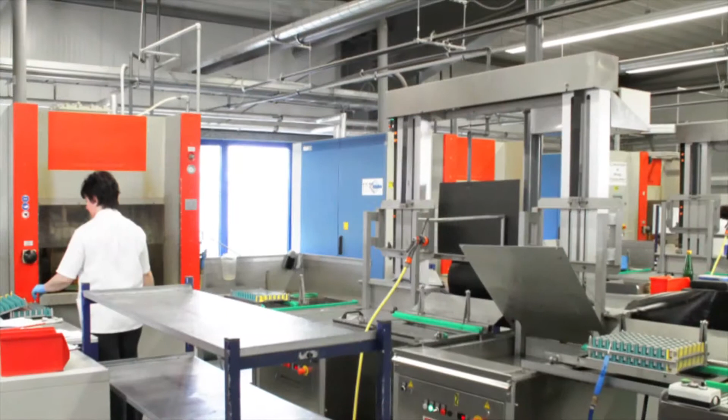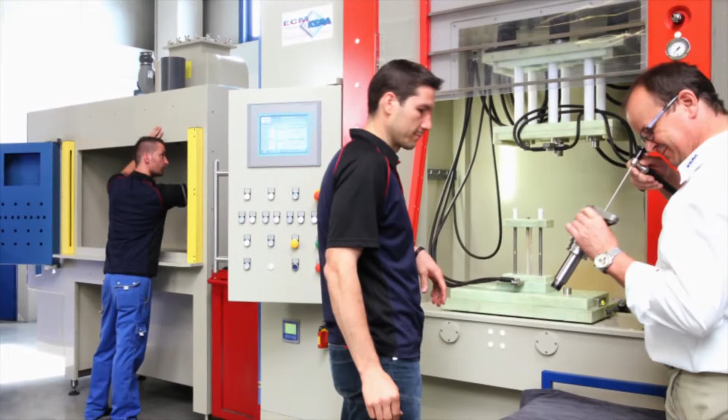KSMA's unchallenged expertise lies primarily in ECM technology, in addition to the related activities of jig building and contract processing. The tremendous potential of this technology was already recognized by the company at an early stage and was further developed and refined in original solutions.

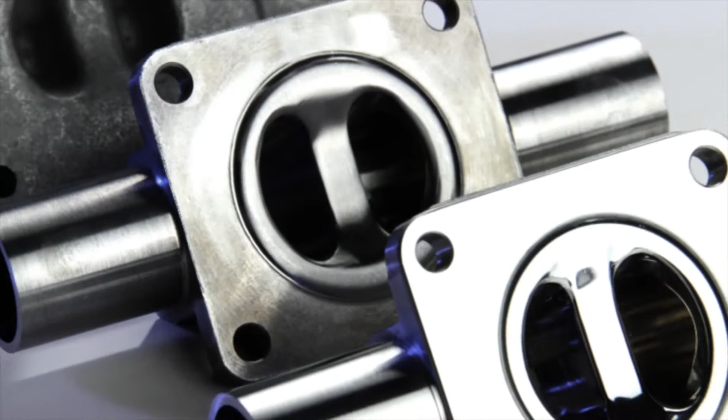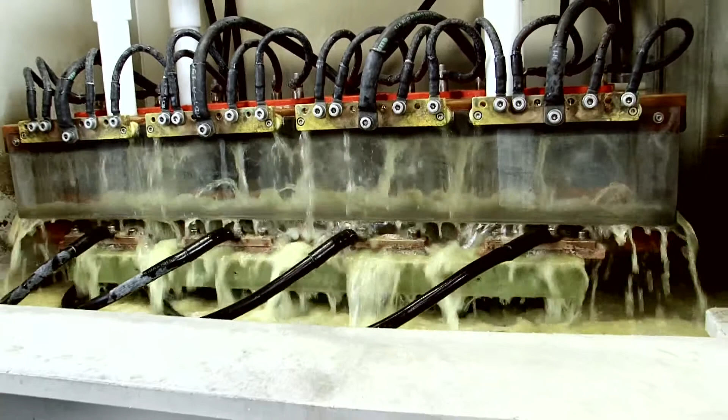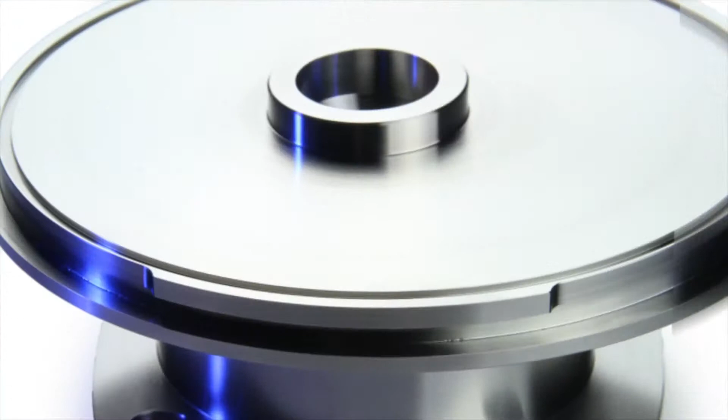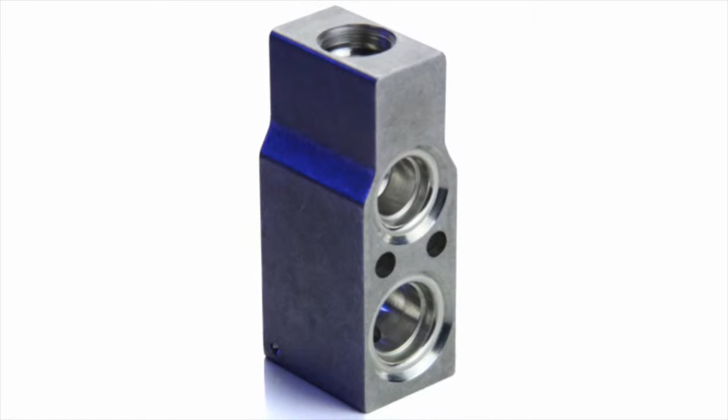During electrochemical machining, particularly very hard materials can be processed with a high level of precision, without any mechanical force transmission, and the accompanying modifications in the material characteristics such as hardness or toughness. This method allows precision deburring, addition of chambers, contours, and drillings in workpieces without modifying the structure of the component, without debris being an issue, or performance of tapping and polishing work on highly sophisticated serial components.

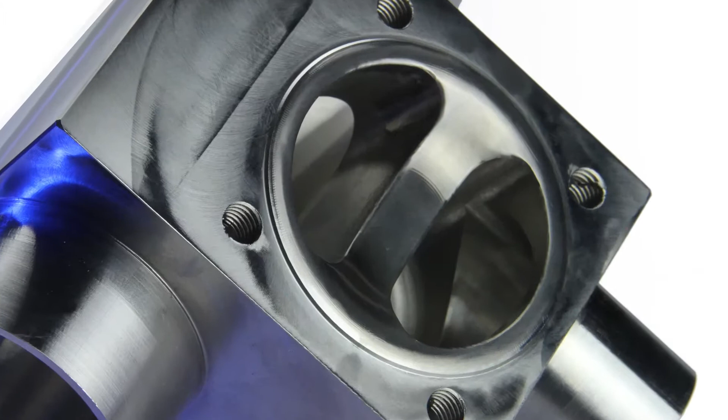Sophisticated solutions for valves and measurement and control technology, the pharmaceutical, biotechnical, and automobile industry.

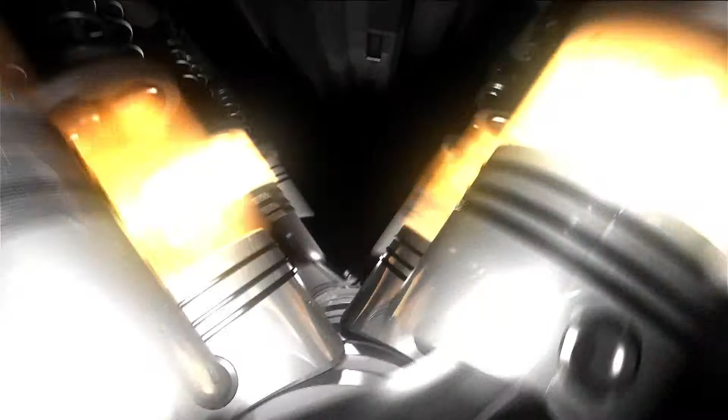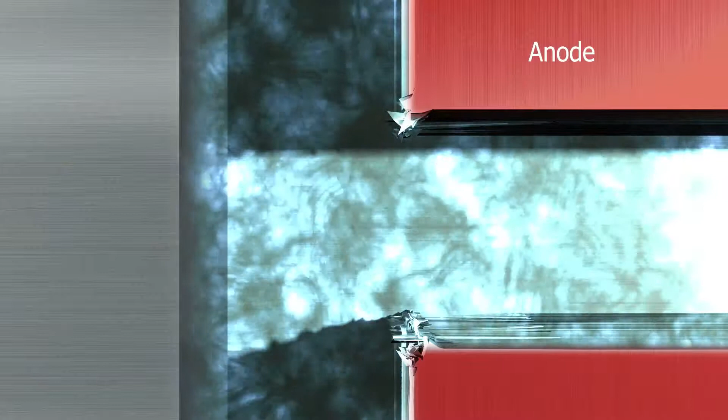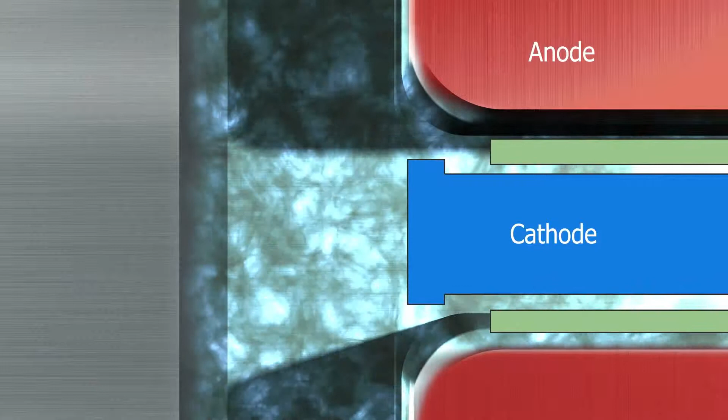In the ECM process, the conductive workpiece forms the anode, and the tool electrode the cathode. Surrounded by an electrolyte solution, the material is specifically electrochemically decomposed by the action of the direct current. Mastery of this process during serial production calls for complex know-how.

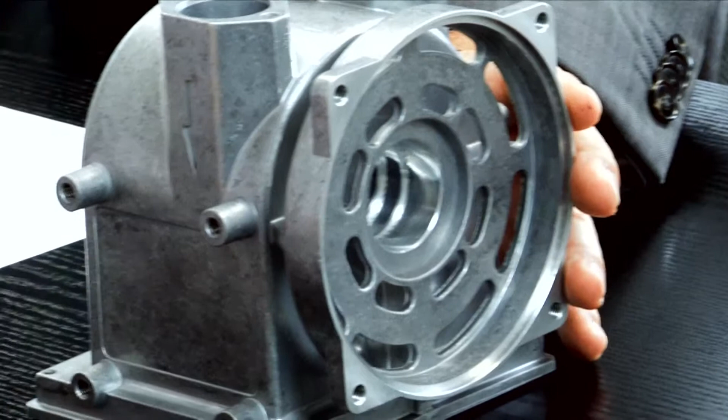KSMA covers the entire spectrum of the workflow chain. That is why it makes sense to contact us already during the development phase. We are familiar with notions such as simultaneous engineering and supply chain management, and develop and produce the appropriate ECM plants and matching jigs.

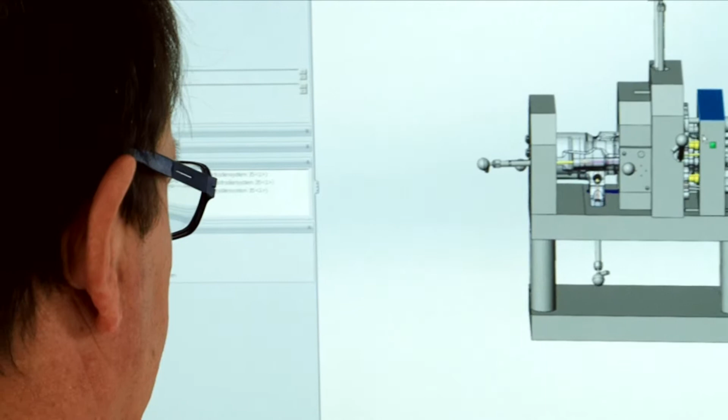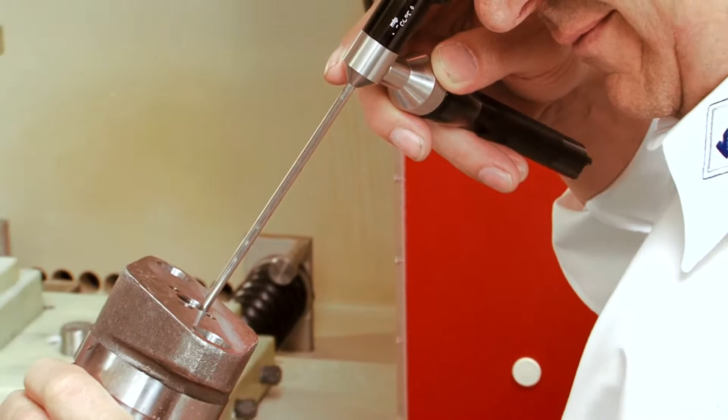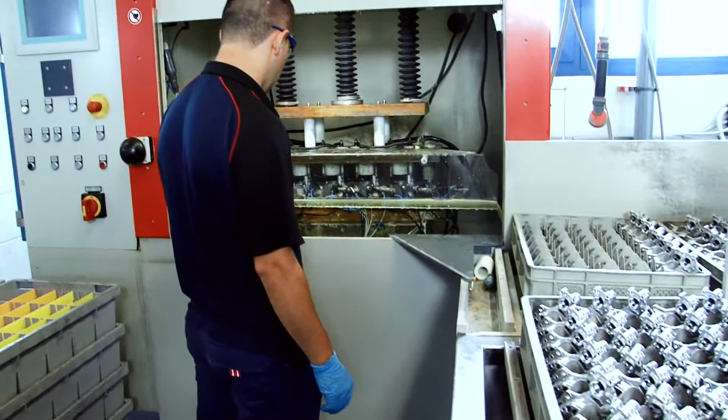As a system provider covering the entire spectrum of ECM technology, we are able to provide our customers feasibility studies, cost efficiency analyses, and prototypes at an early stage. The decision is also made in this case as to whether serial production at the customer's premises is profitable, or whether the component is to be produced by KSMA ECM contract processing.

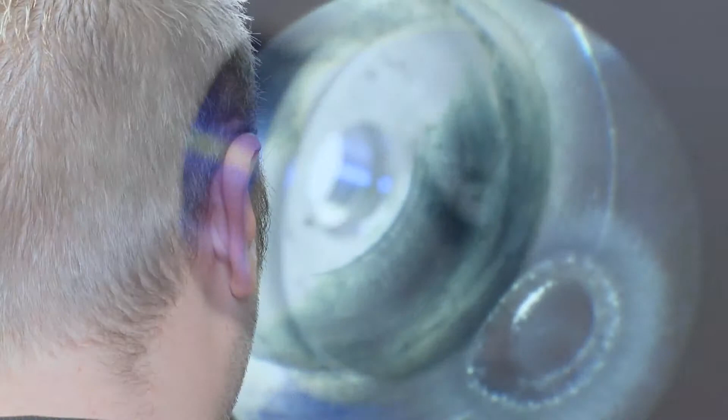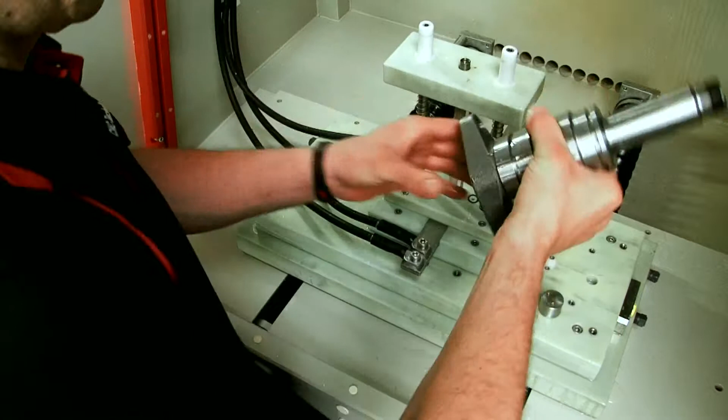Today's innovations are tomorrow's jobs. When it comes to ECM technology, we were part of it from the very outset, and have assigned tasks to this innovative technology that would have been inconceivable a few years ago.

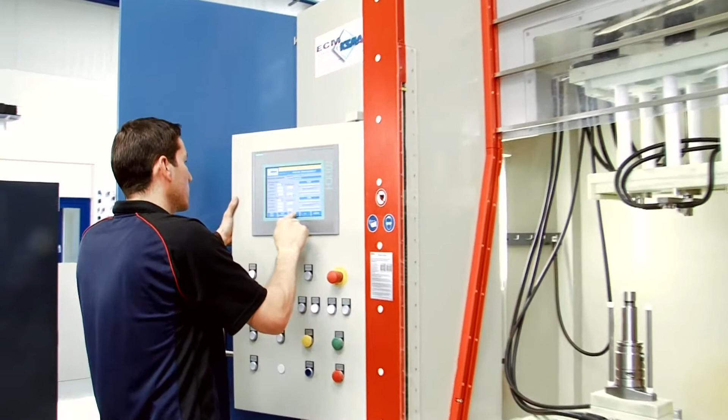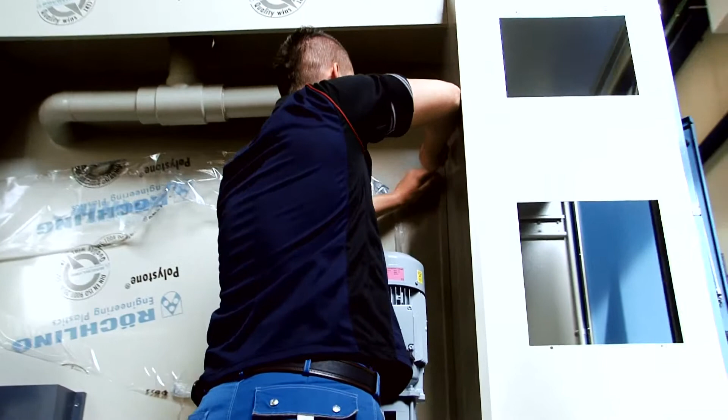A major share of our annual budget is directly allocated to research and development. We have precise knowledge of our market and know what will be needed in the future. And since the markets are evolving increasingly quickly and the product life cycles are becoming increasingly shorter, we directly incorporate these requirements in our plants and jigs.

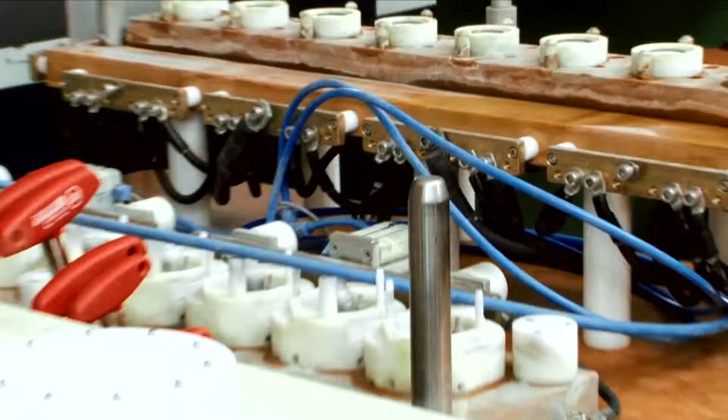We improve the degree of efficiency and also ensure that our machines and plants will require less energy in the future. Experience plus innovation equals sustainable growth for our customers and for us too.

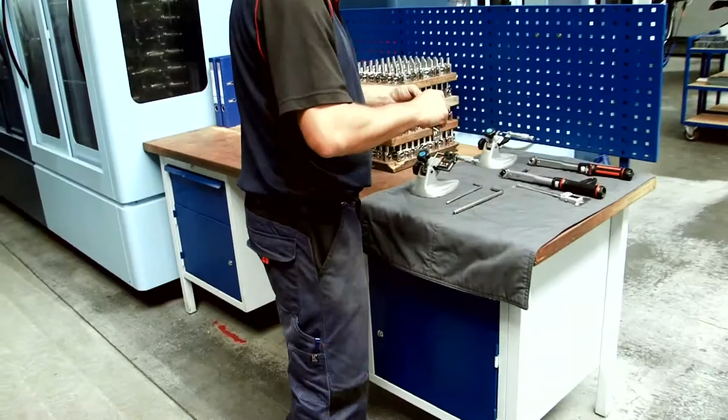If ever the past has taught us a lesson, it is that the market can sometimes behave more flexibly than previously predicted in the boldest calculations.

We are familiar with your products and know what you need. Outsourcing of various product stages ought to form part of our joint product strategy, so as to be able to react to fluctuations in the market.

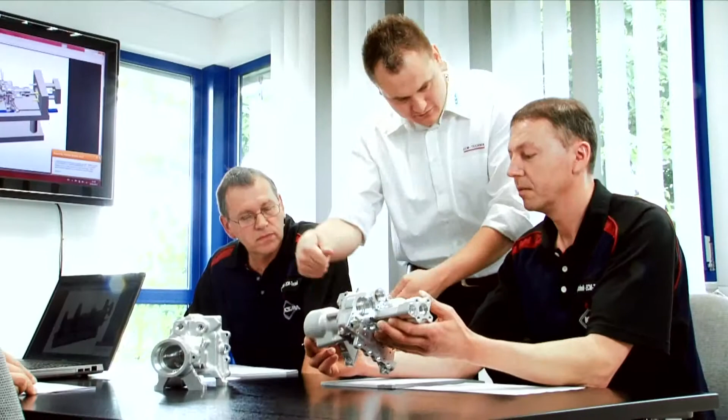A product life is too short for us. We think further ahead. We think, above all, holistically. This means training our customers' employees and providing the necessary know-how transfer.

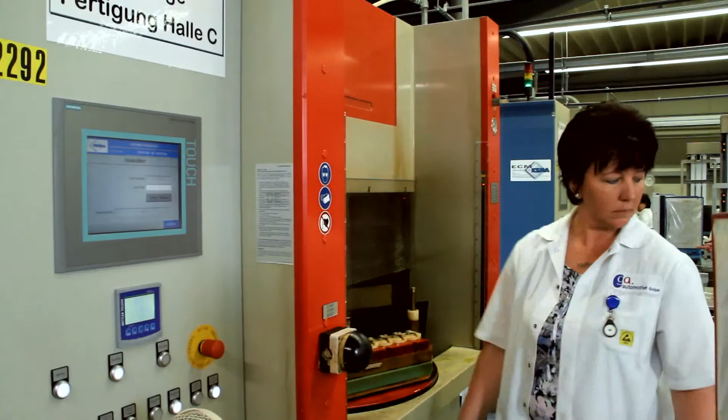We endeavor to provide our customers everything they need within our service portfolio in order to accomplish their tasks, either with new ECM plants, with upgrading and retrofitting of existing ECM plants, or also with ECM contract processing for smaller, medium-sized, and larger series. As a system supplier, we are also, however, a partner for CNC serial components.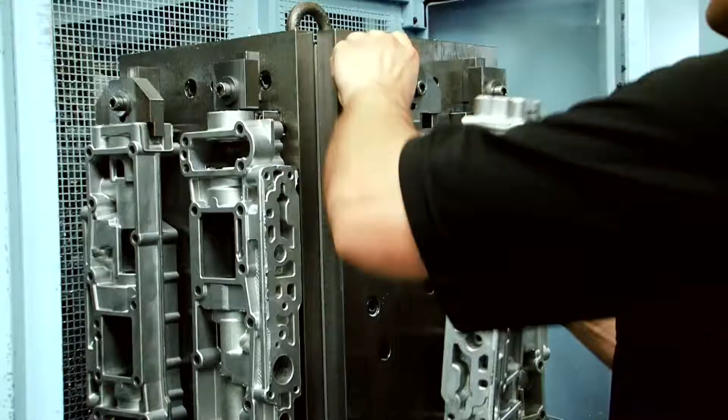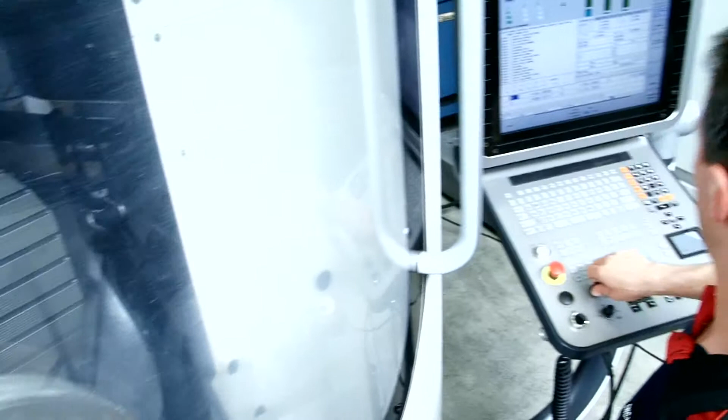Even we cannot work miracles, but we can apply our know-how in such a way as to provide you a reliable partner by your side, who also masters the entire logistics sector. Not so big as to lose sight of the individual service, but nevertheless big enough to master even larger assignments on an equal footing. Partnership with guaranteed added value.

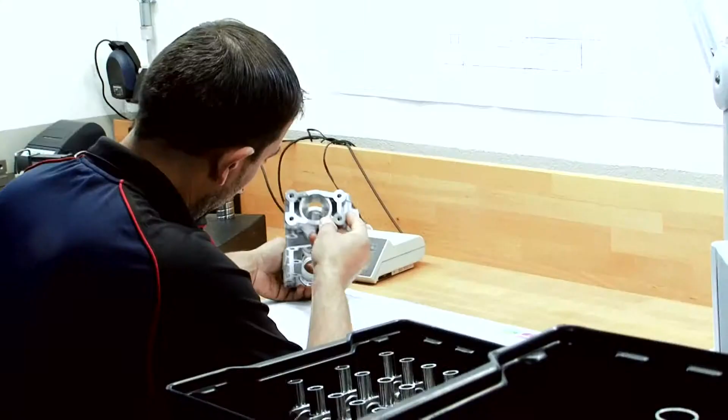KSMA's fine reputation is based on sustainable and far-sighted company planning in pursuit of quality improvement. Continuous improvement of workflows and production stages is therefore your asset in working together with us. In order to fulfill your requirements in the future too, we place emphasis on two factors.

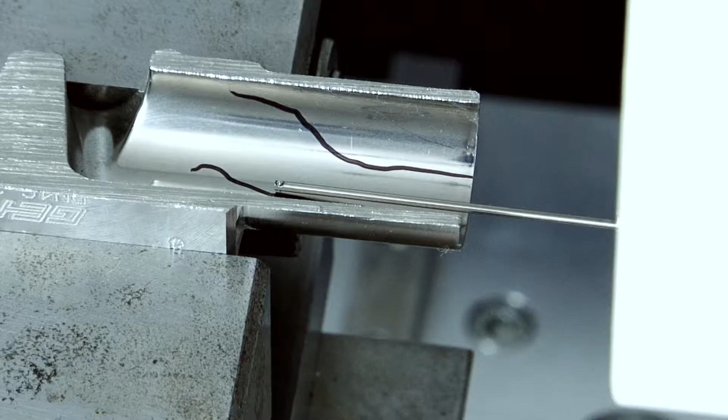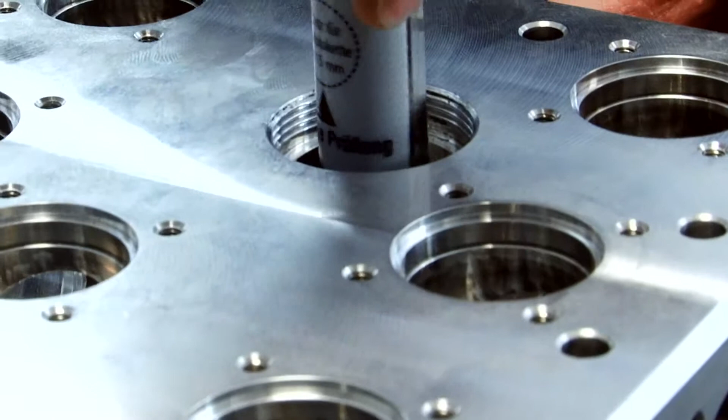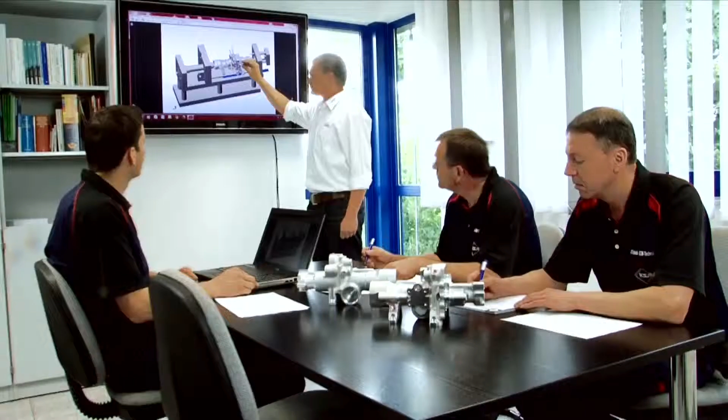First, owing to the extremely complex set of tasks involved, training, qualification, promotion, and motivation of all our employees have always occupied a central position in our company structure. Through specific training, we convey all the support and methods of our quality management system in order to enable our employees to cope with the daily challenges confidently and with state-of-the-art knowledge. We naturally also provide apprenticeships, for good employees are our best capital.

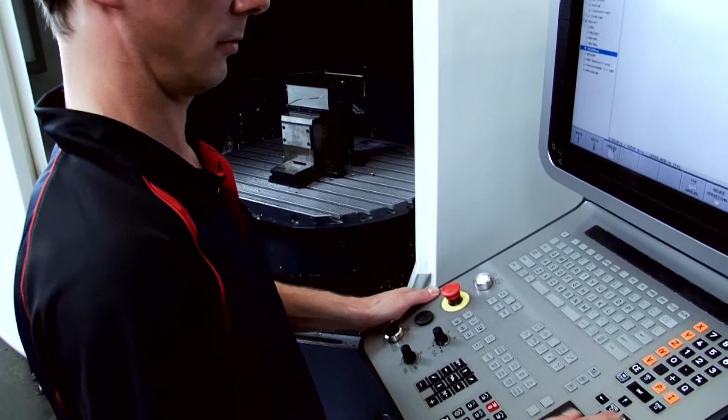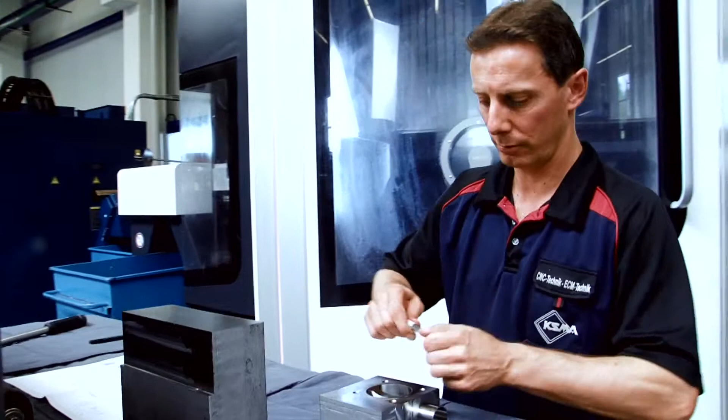Second, investments. We invest in the production process and constantly care for and maintain our fleet of machines. Investment decisions for our new technologies and machines are made at an early stage, with the result that, A, we remain one step ahead of the rest, and B, we constantly optimize the production and machining process.

KSMA, system supplier for innovative ECM technology.